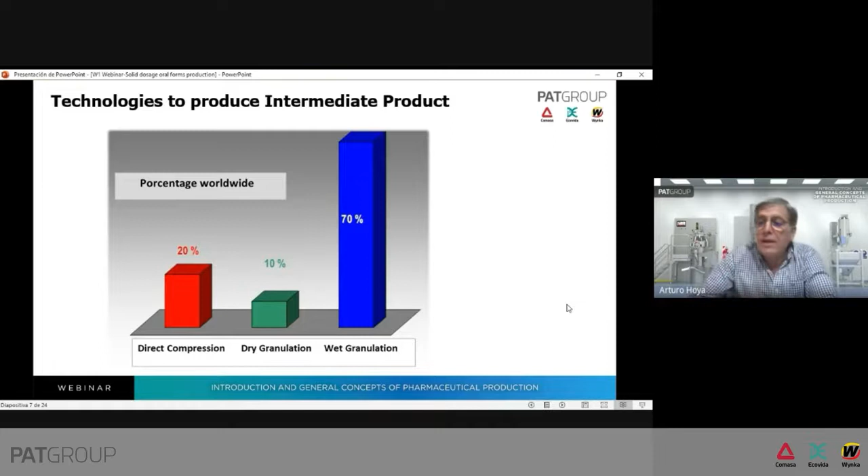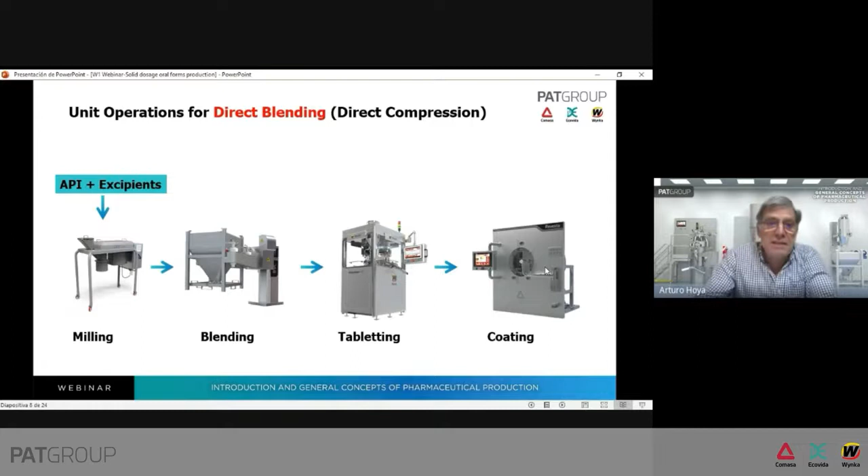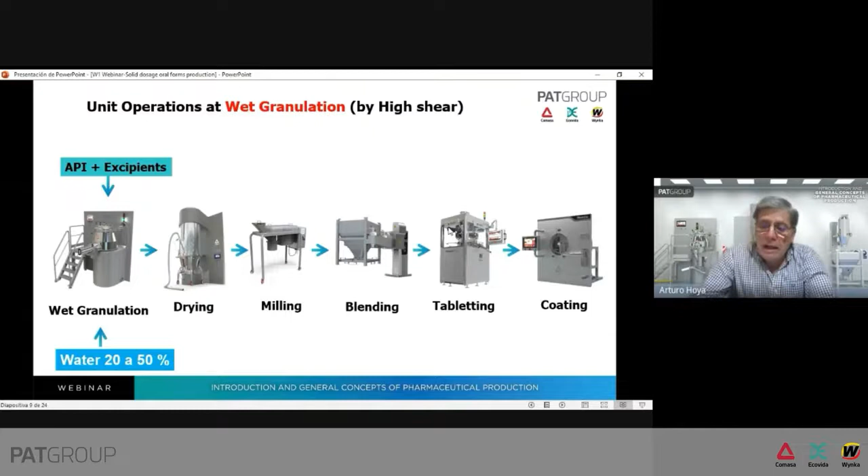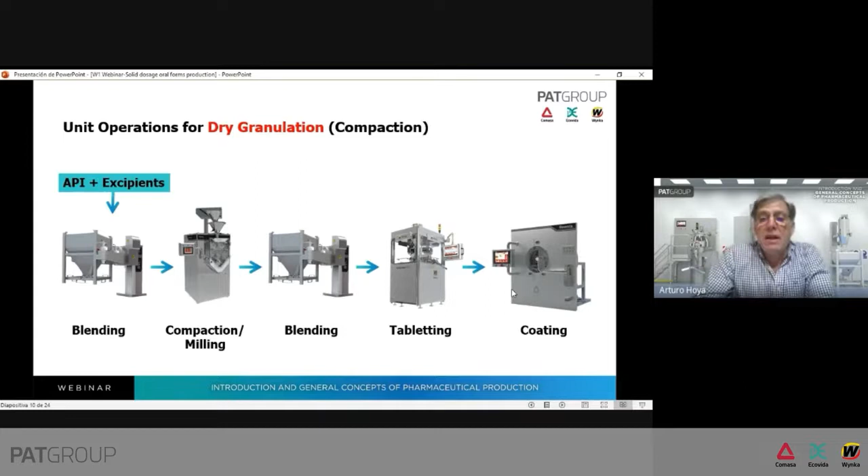Then we have the line of dry granulation. In dry granulation, we put the API and excipients into the blending machine, blend the components, and then we make a compaction, which means introducing mechanical energy to transform powders into briquettes, into tablets, and this compactor has a mill here in this position that grinds the tablets or the briquettes to produce the granules. These granules are put in the IBC, blended the adequate time, lubricated, then tableted and coated. So this is in short the steps we need for the different general processes to obtain the intermediate product that will be tableted and coated.

And the next question is which parameters we need to approach in the selection of the equipment. So in the following slide, the purchase of pharmaceutical equipment will be focused considering the OEE approach. Perhaps you know this acronym OEE, which means overall equipment effectiveness. And what does that acronym mean? It's an index of

efficiency and efficacy. In this paper, American Pharmaceutical Review in 2017 said, acquiring equipment and implementing it effectively becomes a strategic imperative no pharma manufacturer can avoid. This is a very important question because you have to keep in mind that you need to measure the efficacy and the efficiency of the machine you choose. The process and manufacturing community understand this factor; OEE offers a solid foundation for measuring or scoring operational excellence.

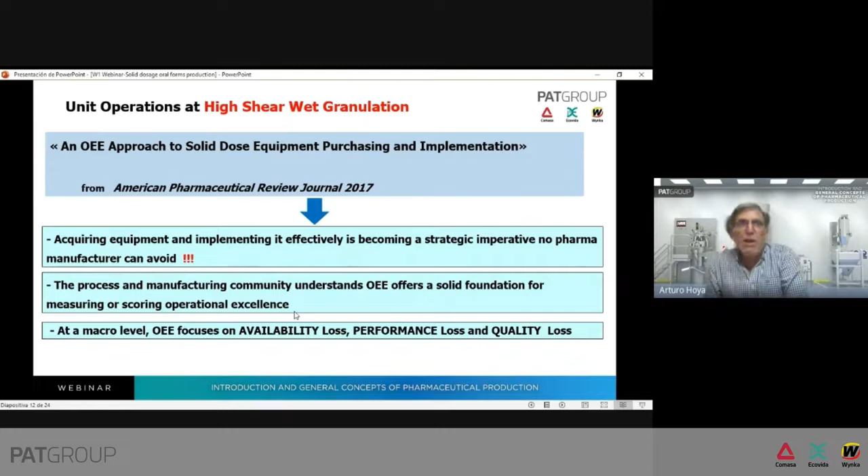And what does OEE mean? It is the combination of availability of the equipment, the performance of the process, and the quality of the product. To keep this in mind, we can look at this formula where we see that OEE is equal to the product of availability of the equipment, the time you have the possibility to use the equipment, times performance of the process. The process must be conducted at high speed. This is a very important question. Of course, times quality, because the better the quality, the better the performance.

Of course, availability means the real operation time divided by total operation time. Of course, B divided by A is always lower than 1. Performance of the process is real process speed divided by optimal process speed. Again, this is less than 1. And quality is the real quality production, F, divided by total production, E.

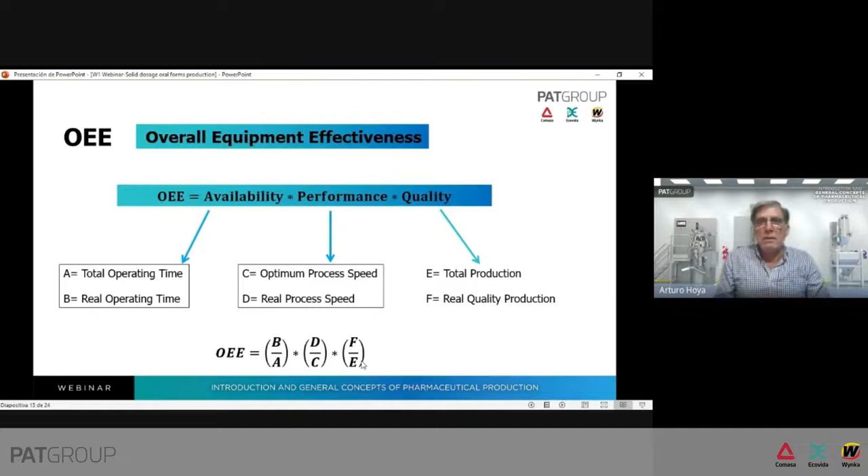And again, this is not 1 but lower than 1, because the availability of the equipment is not 100% of the time, because of equipment failure, because of configuration. So the availability of the equipment is reduced, and the performance of the process needs to be at high speed with minor stops, and the quality of the product needs to reduce process defects and enhance the yield. So if we take apart the availability of the equipment, because availability of the equipment depends on

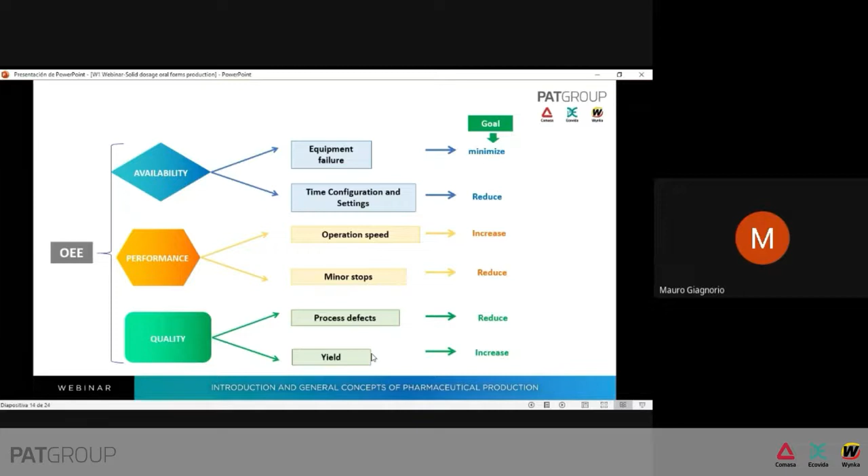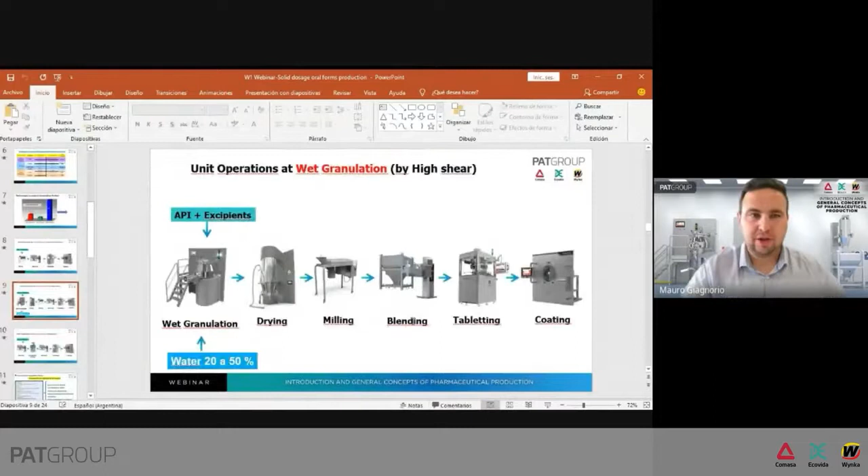Sorry, Arturo, I think your microphone is blocked. You are mute. Arturo? Yes. Now we can hear you. Okay, but you lost part of the presentation. Yes, the last 30 seconds. Okay, let me. You see this? Yes, we can see your screen. Okay, excuse me. Yes, just there.

Okay. Look, the very important question: of the factors of OEE, availability we can take apart and put the attention on performance and quality. Performance is given by the operation speed. So if we increase the operation speed, we will have a good performance. Of course, we need to reduce the minor stops. In terms of quality, we have to produce fewer defects in our product and increase the yield. If we obtain high quality and high performance, we will have a good OEE number.

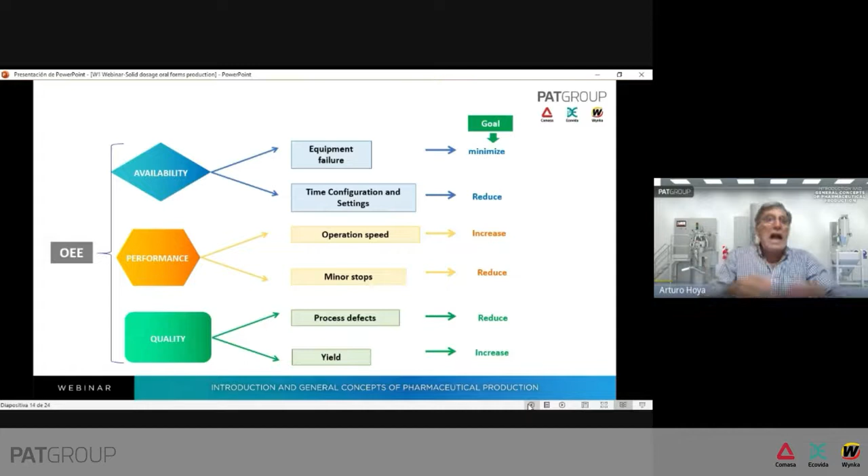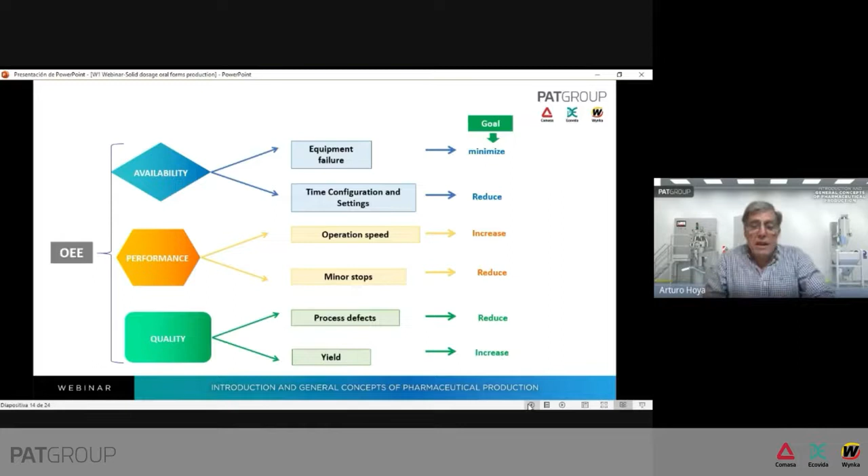In order to give you an idea of the figure, the ideal OEE, of course, is one: 100% availability, 100% performance, and 100% quality. But this is not a real possibility. Normally, in the global industry, OEE is lower than 0.5, lower than 50%. In the pharmaceutical industry, it is lower than 0.4, 40%. So this is a global number, but it's very important to keep this in mind. And now I want to show you the process time factor, that means the performance.

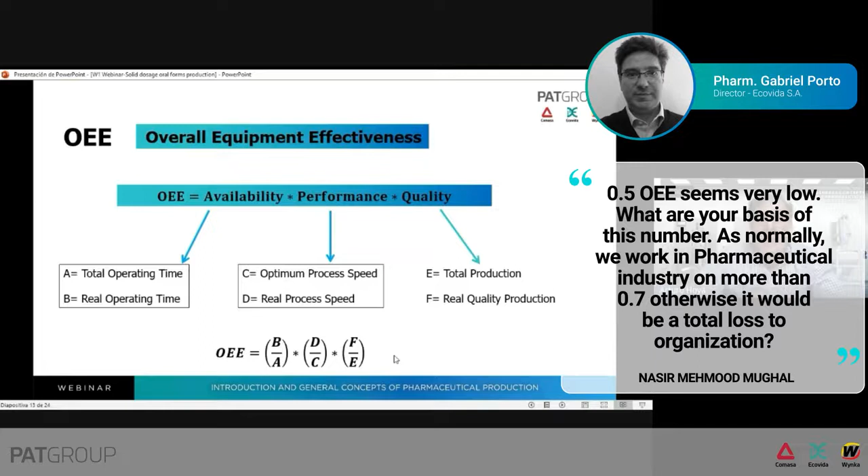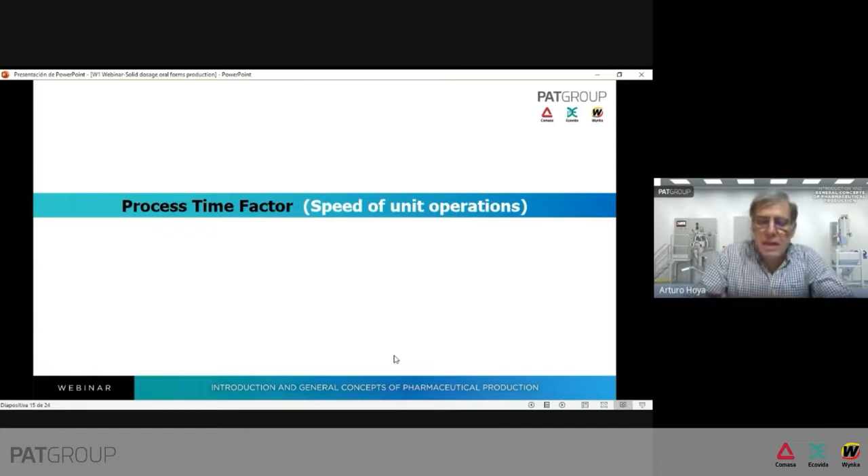And of course, at this moment of the technology, OEE is a very helpful factor for us, and is a key to the selection of our machines. Well, so taking apart availability, pointing attention to the performance, process time factor. Now, in this slide, we will see the speed of unit operation. This is an example based on real figures, wet granulation, tableting and coating, when we want to manufacture 100 kilograms of granules to obtain 1 million coated tablets of 100 milligrams.

This is our example. So in this slide, we compare a conventional production line, let's say a low shear granulation with a double cone tumbling blender, with a static dryer, with an oscillating mill machine, with an optimized line using the high technology we have today and PAT Group produces. Here we will show you the approximate process time for each unit operation.

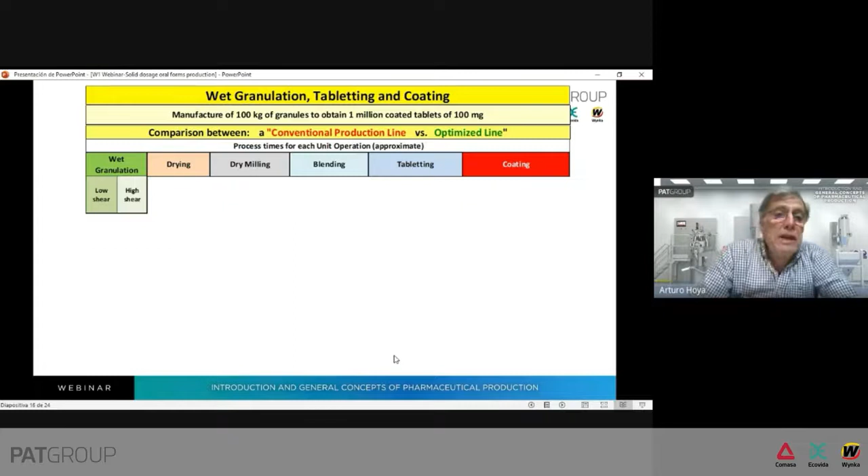And here we have the unit operations in order to obtain 1 million coated tablets of 100 milligrams: wet granulation, drying, milling, blending, tableting, coating. So let me show you that the wet granulation could be performed by low shear or high shear, and the drying could be performed by static dryer or fluid bed dryer.

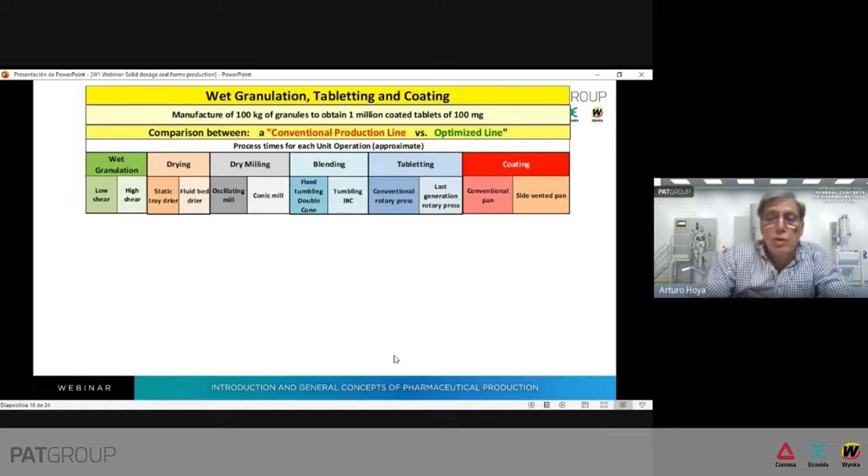Dry milling could be at oscillating milling or conic milling. Blending could be by fixed tumbling double cone or tumbling IBC technology. Tableting could be at a conventional rotary press or last generation rotary press, and coating could be in a conventional pan, blind pan, or side vented, totally perforated pan. So, of course, this different equipment will have different conditions of the process.

For example, I show you one for simplicity, but if you do wet granulation in low shear, you will consume 40% of water. Instead, in high shear, you will use 30% of water, less water. Why? Because wet granulation in high shear is very efficient. So you need less water in order to obtain high quality granules, and so on.

But the important question here is the maximum time that we will use for each of these processes. For example, if you do wet granulation in low shear or in high shear, this is the difference. Low shear means at least 60 minutes in order to obtain the optimal final point of granulation. Instead, in high shear, you only need 15 minutes and you will have the best granules.

In drying, similar. If you put the wet granules into the static dryer, you will need a lot of minutes. For example, 720 minutes against 120 minutes in fluid bed dryer. The difference is very big. When you dry mill, if you use an oscillating mill, the time is 4 times what you use in a conic mill. When you blend, here we have no very important difference. I say equal time, because both double cone and tumbling IBC are tumbling processes.

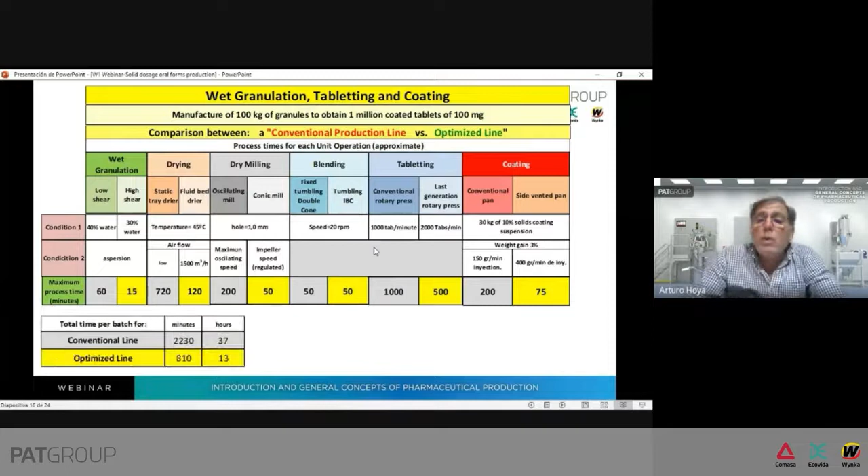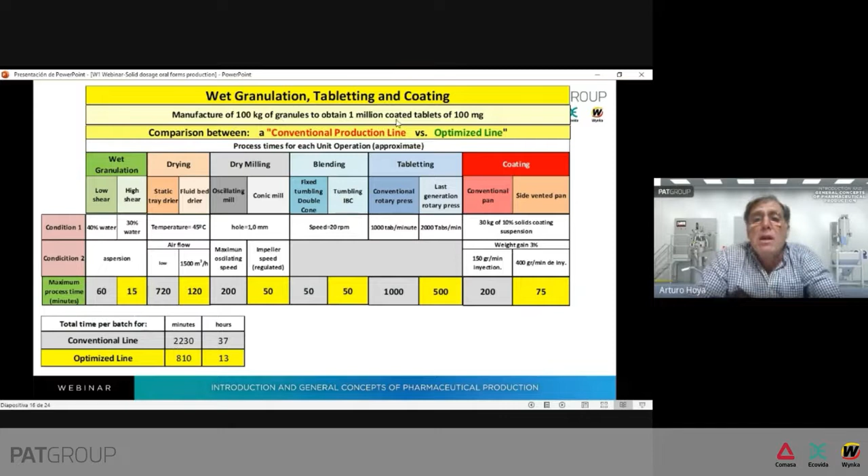When we add all the times, we note that the conventional line needs, in order to produce 100 kilograms of granules and 1 million coated tablets, 2,230 minutes, around 37 hours, against only 13 hours in an optimized process. The difference is very big. So the optimized versus conventional means this saving time. You're saving 63% of the time. The difference is very, very important.

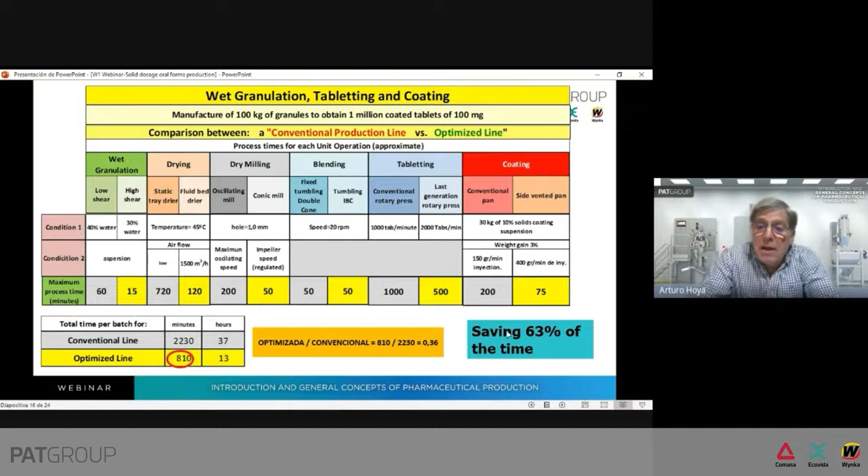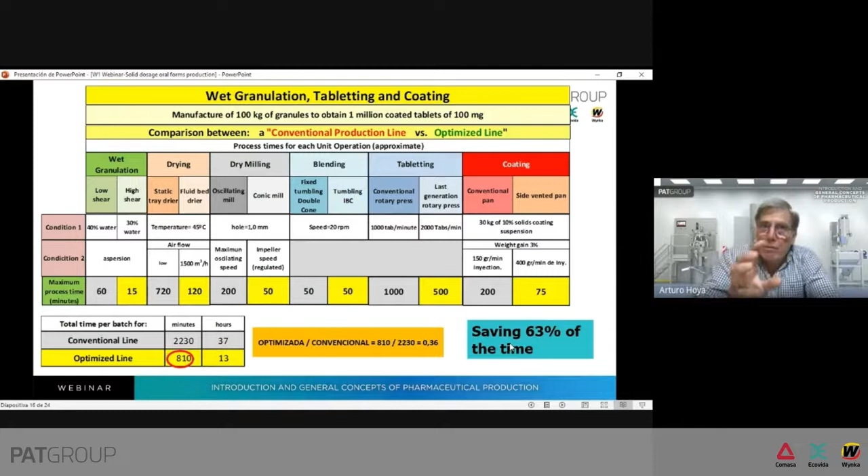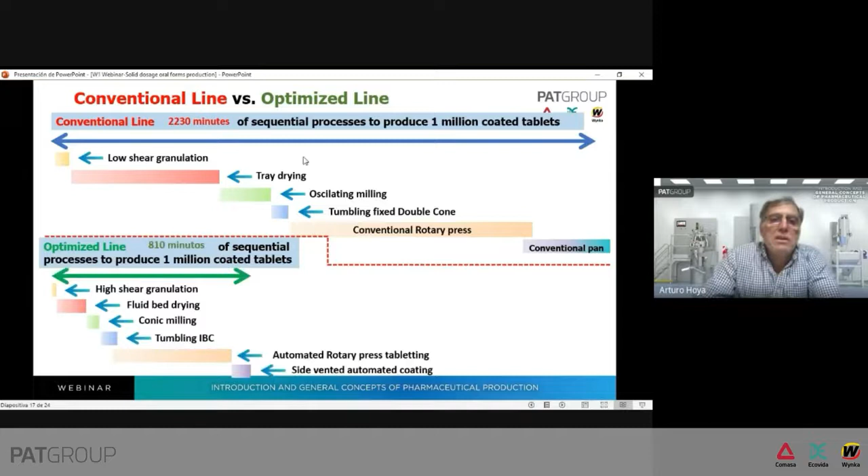So this means that the OEE for each of these equipment, OEE for wet granulation, for drying, for milling, for blending, for tableting, for coating, will be the biggest possible, and will impact the saving time of the global process. This is a very important question. Trying to produce at high speed is a very important question. This is performance. And after this, this is the very same in a figure. You have the global time.

But the other question is the process quality factor, meaning the product quality. Of course, the process never gives us 100% of quality. Defects or loss of powder or loss of tablets, etc. reduce the quality factor and the yield. Here we have the optimized line, the relative advantage against the conventional. So here we show you the unit operations to obtain 1 million tablets.

Wet granulation, now high shear. Drying, now at fluid bed. Milling at conic mill. Blending at IBC, intermediate bulk container. Tableting at rotary automated press. And coating at the side vented pan. So this table is very, very dense, very large. I tried to show you some of the principal questions, and then you can see it with time.

But I want to tell you that when you do wet granulation, for example, you need lower consumption of solvent. You need less water or less alcohol or less alcohol-water blend, because you put in more mechanical energy. So if you put in high energy, you need less solvent. And this impacts the drying time, because you need to evaporate less solvent.

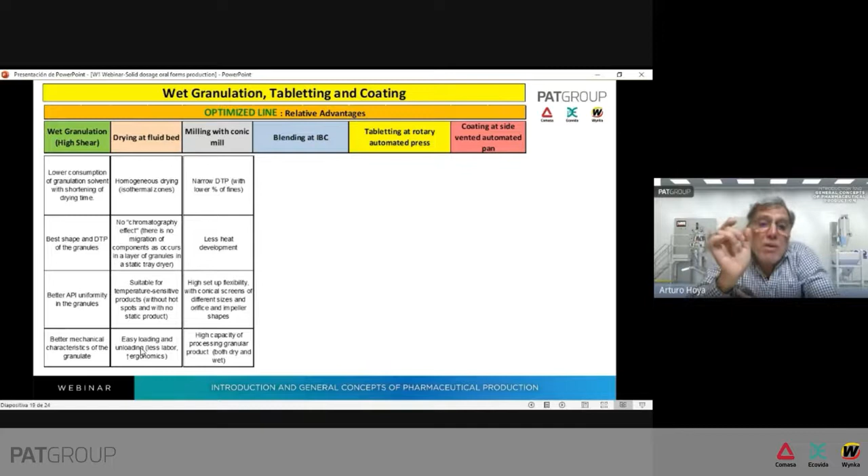In the milling, of course, using a conic mill, you will obtain a narrow particle size distribution and will find that the percentage of fines is lower. This is very important. As you remember, if you have a high percentage of fines, the flowability could be affected. And if the powder flowability is low, you will have problems in the uniformity of weight during tableting. So in conical milling, you obtain a narrow distribution and a lower percentage of fines.

Of course, this kind of machine has less heat development. You have great flexibility because you can select the impeller, the separator, the type of conic sieve, and you can change the speed, the RPM, because you use 100 RPM to 300 RPM, if you need, of course. Another question is the high capacity of processing granules in comparison with an oscillating machine.

Blending is a very important step, of course. We need to obtain homogeneity, uniformity of the components. And we prefer blending in an IBC. IBC, we will see this in the next webinar, of course. IBC means intermediate bulk container. This intermediate bulk container means an equipment where we can blend, store, and use it to load the hopper of the machine. So we eliminate one step of discharge.

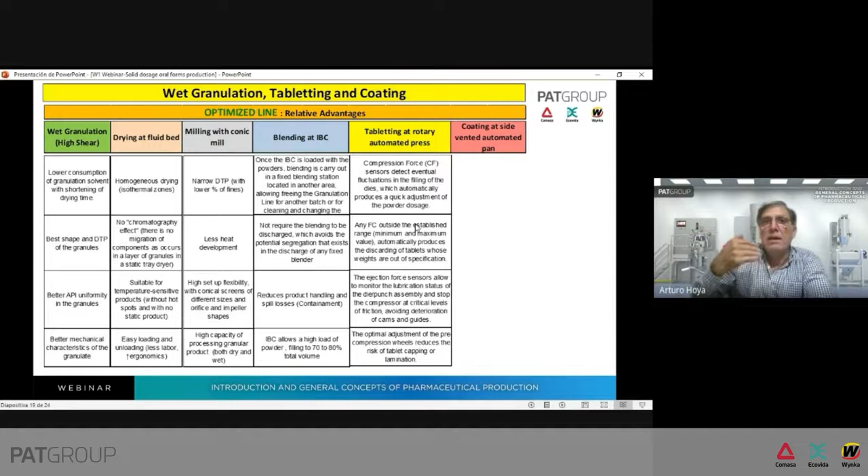This is very important because you work with an automated process, and the machine automatically discards the tablets with high weight or low weight. And this is because the machine measures the force and sends information to the configuration of the discharge device and discards all tablets with weight out of specification. So the compression force produces the discard, as I said.

The ejection force sensor allows us to monitor the lubrication status of the punch. And this is very important because when we lubricate our powder or our granules with magnesium stearate, we have to be certain that it is well lubricated. So this ejection force sensor will tell us that the powder is well lubricated, and this will reduce the problem of the compressor stopping because of friction, and of course avoid deterioration of the guides.

So the force sensor and ejection force sensor are very important to protect the machine and produce good tablets with good uniformity of weight.

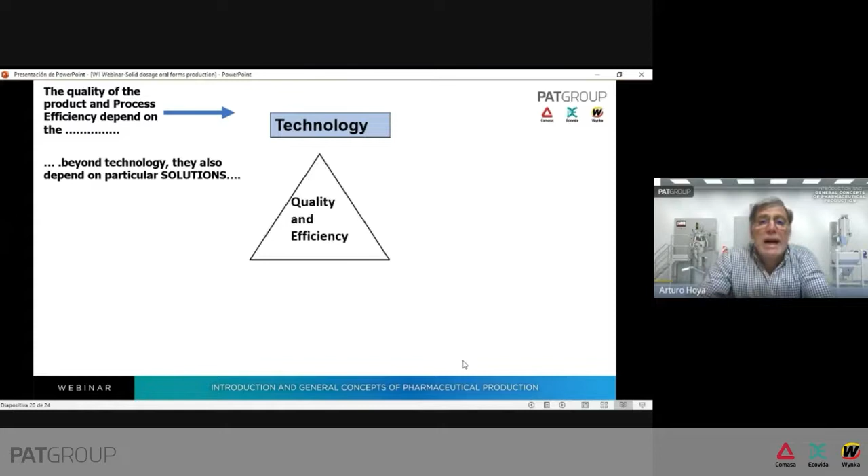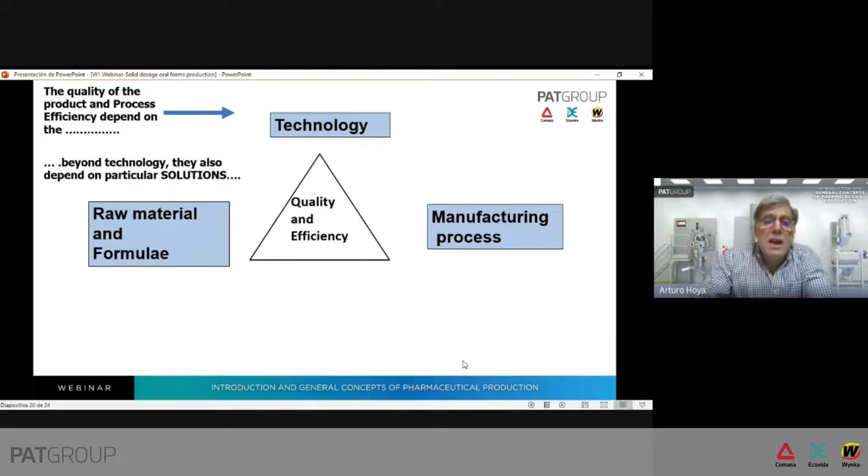Beyond technology, the quality and the efficiency of the process also depend on a particular solution, and quality and efficiency of the production need raw material and formula and manufacturing process. Gabriel spoke before about some aspects of this, and the solution means selection of raw material, a good raw material.

You need raw material in order to produce high quality, purchase, of course, the specification, quality, quantity, composition, and of course, formulation tips. In these processes, there are a lot of tips you need to know in order to have the best quality and efficiency, and expertise.

And of course, for the manufacturing process, we need the best configuration of the production line, set the process variables, the scale up, specific application, and methodological tips and expertise. This slide is a synthesis of the factors that impact the final quality and efficiency. It's not only technology, it's technology plus raw material and formula plus manufacturing process.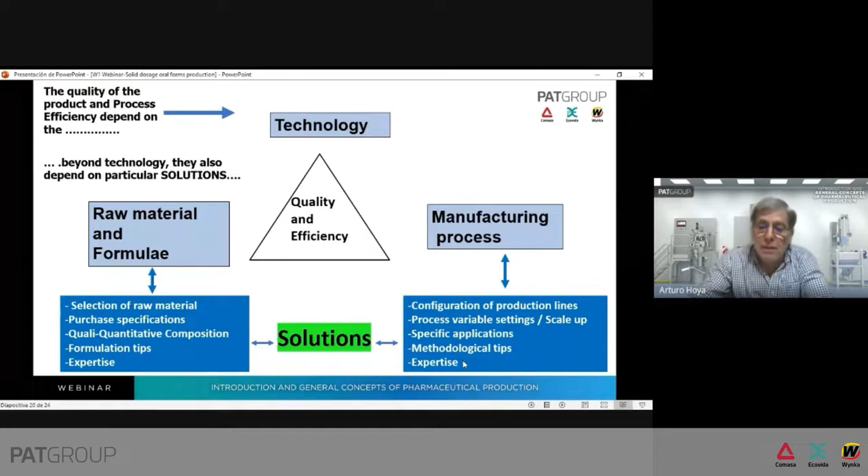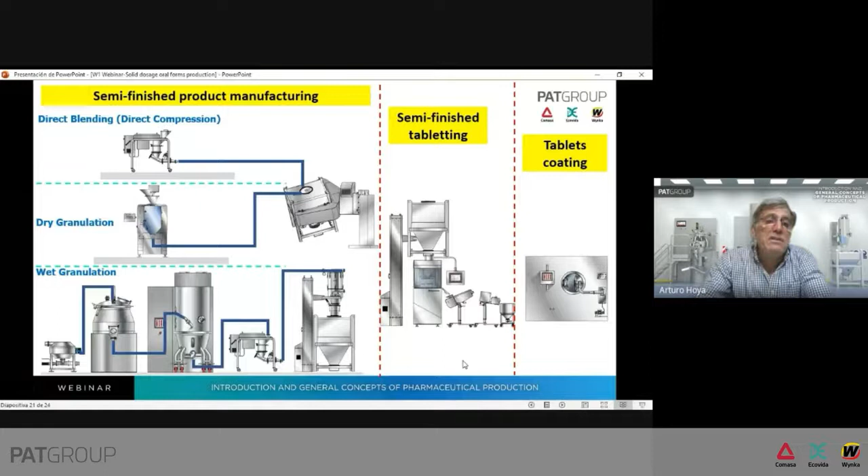If we could optimize these 3 factors, we will have not only high performance, high speed, but we will have high quality of our product. These are the lines shown in the schemes, direct blending, dry granulation, and wet granulation. Well, we will see this in the next webinars, of course. The next webinars are here.

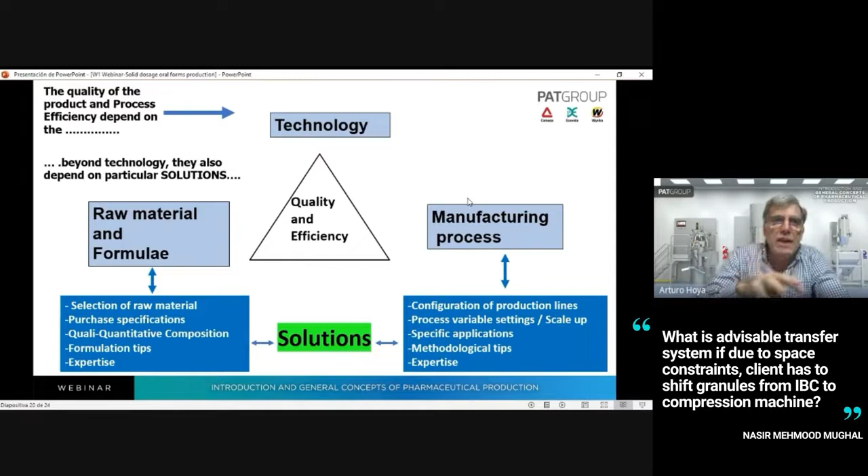So this means that you will avoid the natural segregation produced by the discharge from the fixed double cone to the tank or vessel. You eliminate this step. So IBC technology is the best way to blend, store, and load the hopper of the machine. You avoid the segregation. Is this the response you need?

Nasir, is this answer okay for you? Yeah. No, Mauro, can you hear me? Yes. Now we can hear you.

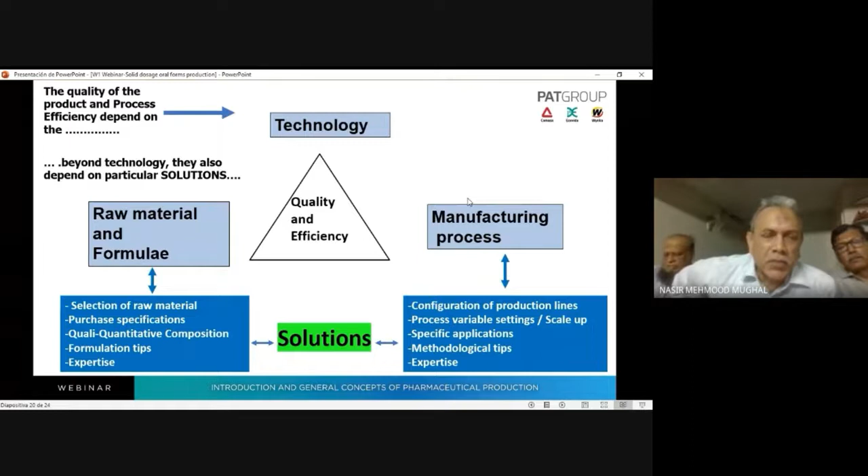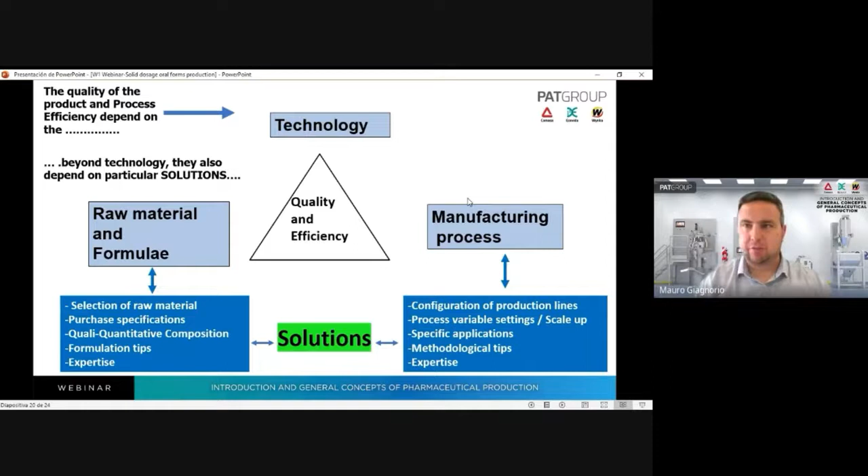Okay. I was just asking, if a customer doesn't have space to use top-load IBC bins, what would be the ideal method to transfer finished granules from the IBC bin to the compression machine? You mean because in the tablet area there is no height to have a bin blender on top, right? Exactly. So you don't have enough room to put an IBC above the tablet press. Yeah, above the tablet press machine.

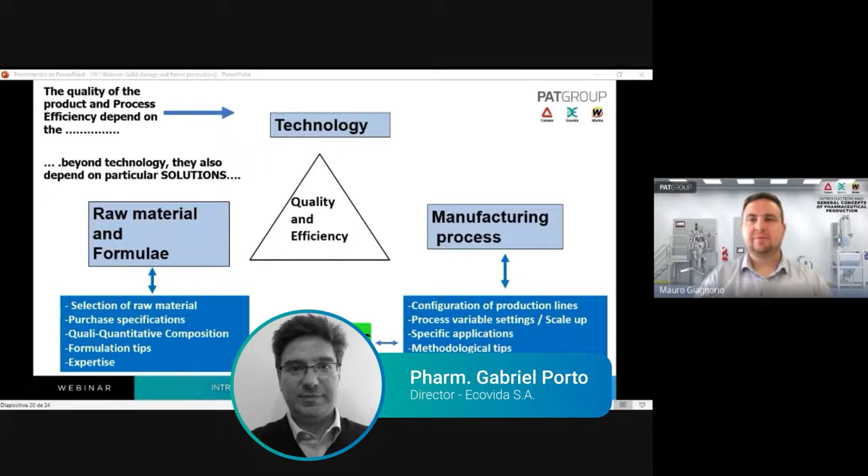You should be very careful in the selection of the way you load the tablet press machine. If you have a mixture that can segregate during transport, then it's an issue. Preferably always by gravity would be much better. I think we should analyze the kind of product we are talking about to define if the transport by vacuum is okay or not, or if we can have a segregation of the mixture.

So yes, powder conveying, but vacuum is not the best. At least you need a block transfer. The technology will produce the transport of a block of powder from the storage in a segment, not fluidified. In a typical vacuum convey, you produce a fluidification of the blend, so you could obtain segregation because the particles are different in size, density, and shape. So the conveying must be in block.